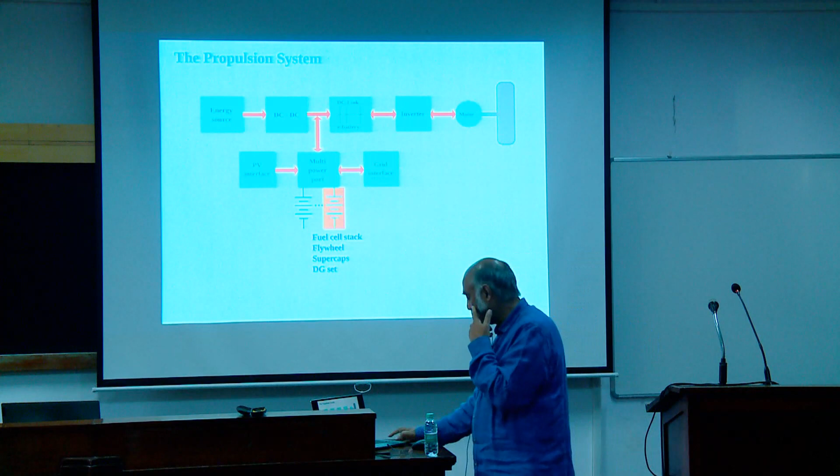The grid interface is slightly more complicated in the sense that if you have one EV or a few EVs in the city, no problem. But if all the vehicles in the city are EVs, evening comes and everybody puts them on charge, the grid will go down. Once the grid goes down, it doesn't see the load, and then it will come up, and then the grid again sees a heavy load, and it will go down again.

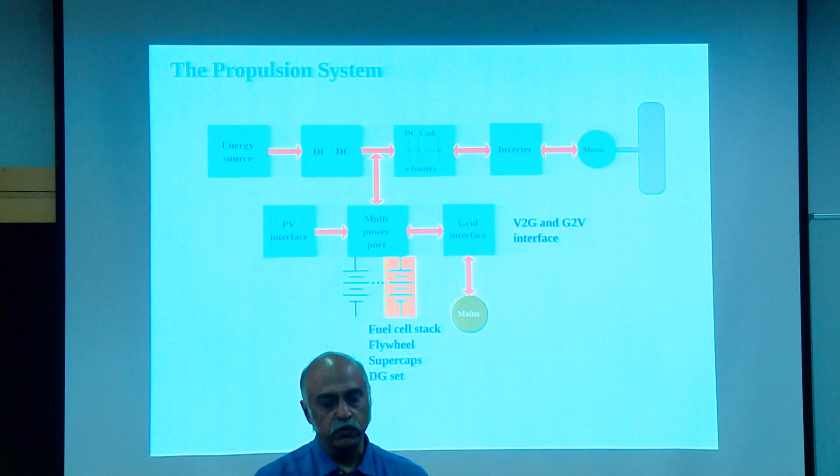So it will start having a problem, and you need a very intelligent solution. V2G solutions are something that really has scope for research, where the batteries in the EV will act as buffers - you take out energy from the battery and put it back in the same cycle, reactively, like synchronous capacitors. So they will act as these kinds of buffers which stabilize your grid.

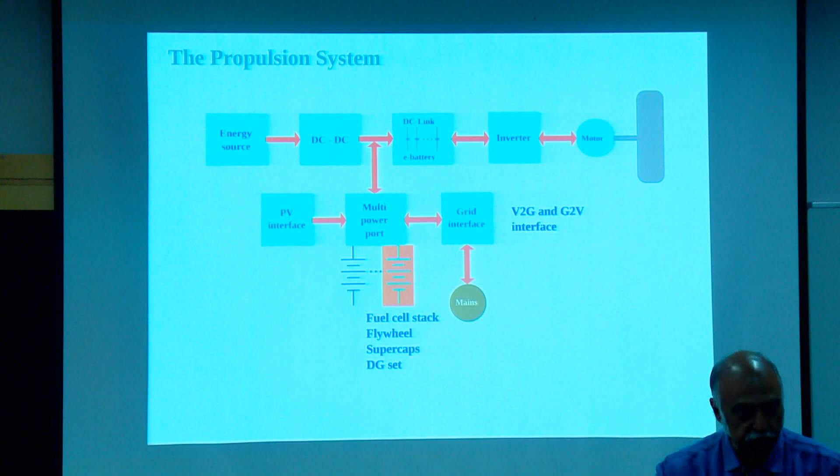Which means - which battery should I use as a buffer, which battery should I use as a source, which battery should I use as a sink. That is where the issue will come among the million EVs which are plugged onto the grid. That is the challenge which will start coming in.

Before we go forward, something on the energy budget - these are some numbers obtained from having an electric vehicle moving in the campus, several rounds of campus trips within the campus, not gone outside this one.

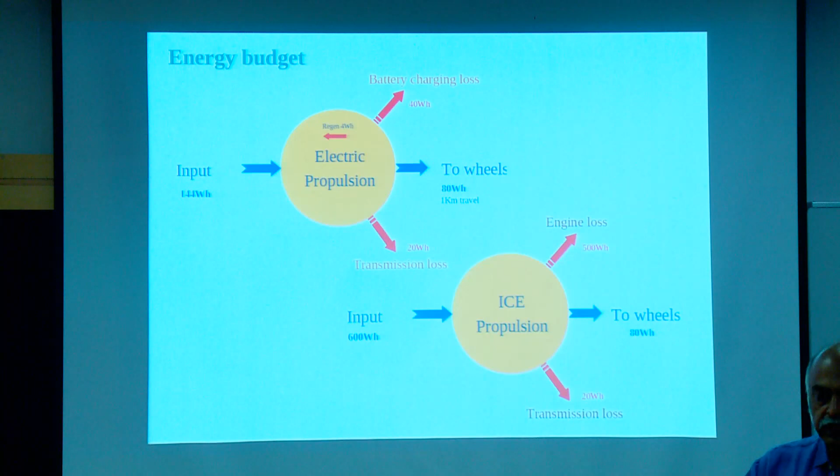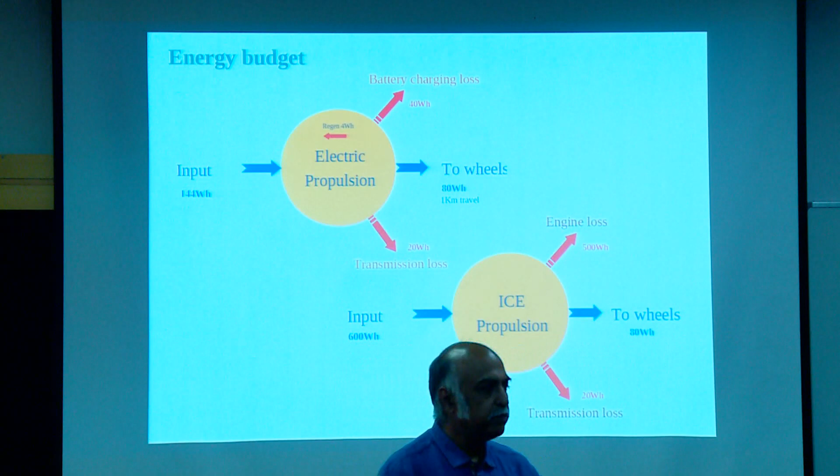You should take this as a feel, in the sense that the road qualities are much better within the campus than outside, so the rolling resistance is on-campus rolling resistance, and there is not much opposing wind, so the air drag is also minimal. Under those conditions, with the same weight between an IC engine and electric vehicle, this will give you some feel for the numbers of how much energy is going to be consumed.

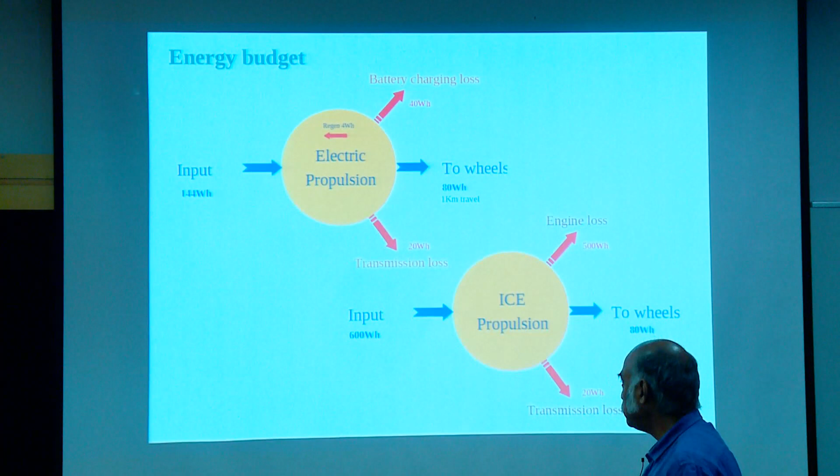So if you take this fellow, if you travel 1 kilometer, you will need 80 watt hours for the wheels, 40 watt hours. This is not under acceleration condition, but under stable, steady velocity conditions. So battery charging losses, transmission losses, there will be a gearbox, a fixed gearbox, and it will have some loss. 4 watt hours will be put back due to braking, and you will have this up and down on roads. So input is 144 watt hours, and out of the 144, you get back 4. That is what you will see at the wheels, meaning at the vehicle.

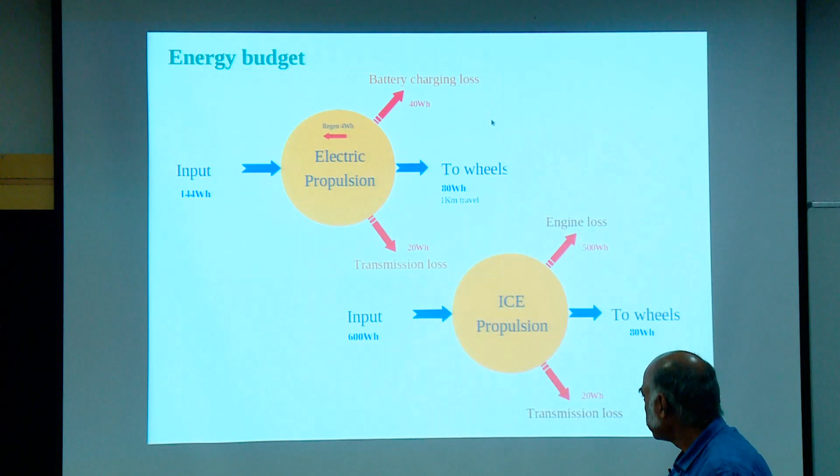And this guy is slightly more, in the sense that 80 watt hours, 20 watt hours, that will be fixed more or less. The 500 watt hours in the engine loss.

Now that is where people are thinking that they are going to save the climate and save the earth, but it is not so. Be wary of this. You will see a lot of advertisements.

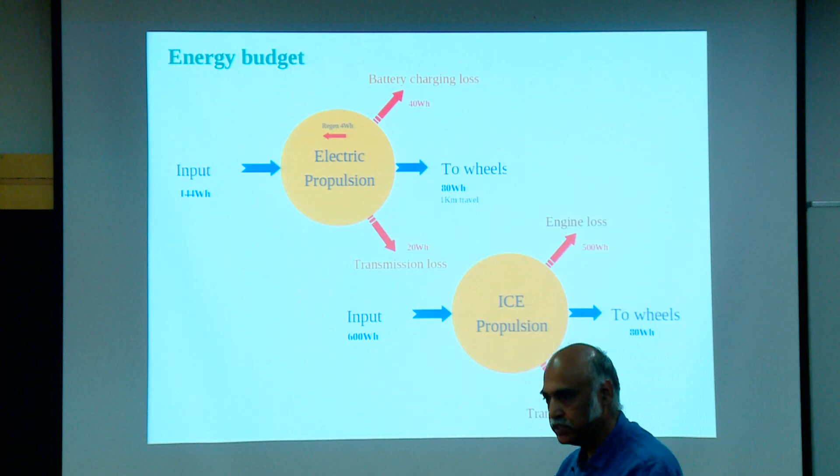Green power, EV is very green, and all those things. But what we have only done is shift the pollution sources from the wheels to a central source, maybe manufacturing of the batteries and things like that. You are not going to save much, and especially in a coal-driven economy like ours, with transmission losses, it is going to be much worse. So better to use the ICE if it's about saving the planet, but if you enjoy driving EV, just enjoy it. Don't say that it is green, even though the board is green.

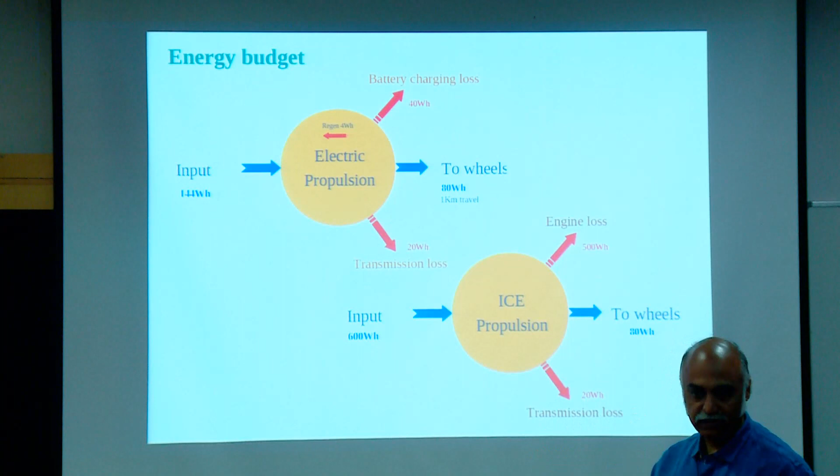Here again there are some myths. On the left-hand side is the EV, on the right-hand side is the ICE engine. The ICE engine's one significant advantage is that it is using the best fuel on the planet, the best power density, the best energy density fuel on the planet, which is around 12K plus, 12,000 watt hours per kg.

No other source on earth can match that. Lithium ion is at 250. This lead acid battery is 35, very nice, right, watt hours per kg. So you will never be able to, at least in the near future — I can safely say that because I don't know chemistry, but chemistry guys will have to work real hard to get to the energy densities which nature provides. Petrol is that, diesel is also around that much, coal is around 10,000 to 12,000. All the fossil fuels are in the 10,000 to 12,000 bunch.

So on the other hand, if you look at the efficiency of ICE engines, 15% I have put on average, but today's ICE engines are at 22%. You have the good machines which are even 25%, and you have the bad machines which are still lower. But on average, I can say 15% on the ICE side and 70% on the other side.

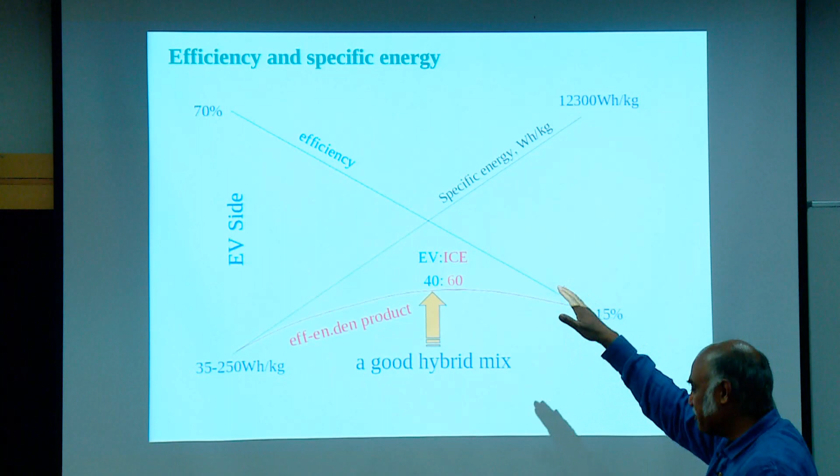So anyway, we will talk only from the EV point of view, not that side, otherwise we will get very discouraged. So from the EV point, enjoy power electronics, enjoy the EV, that's all.

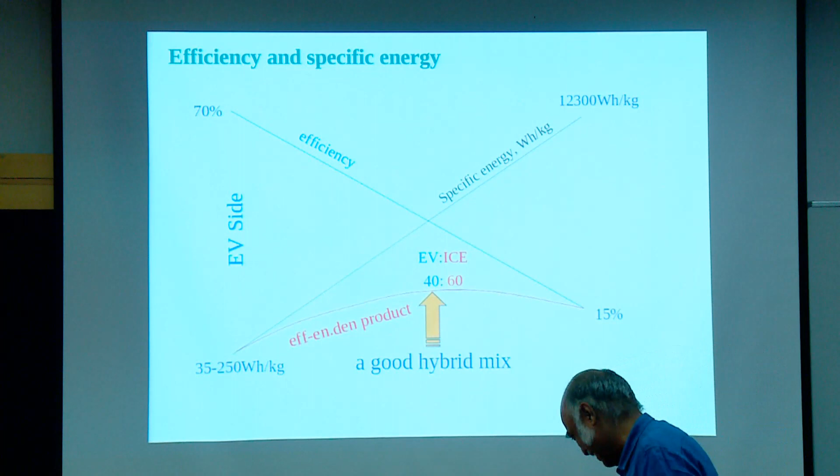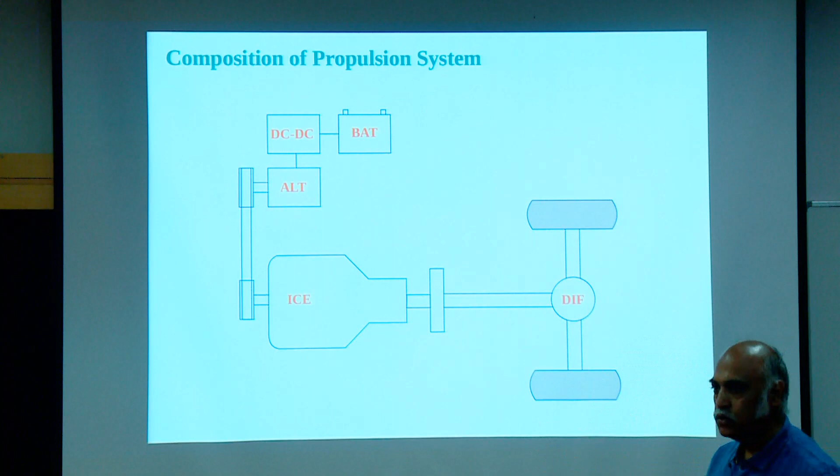Let us just see the composition, the components, what goes in. So this is a typical ICE engine — I am representing the internal combustion engine as that, and then you have the differential and then the wheels. This is what we have been driving all along. And we have an alternator — normally in all this, we have an alternator that charges the battery. So I will say you make it big, you redesign that alternator, and then to that shaft I can have that alternator, and then a DC-DC converter.

The DC-DC converter we know how to do. Power electronics is a solved problem, so today we don't work on power electronics.

We only work on the software within the embedded software controlling the power electronics, but power electronics is actually within an IC or within a module. So it is a VLSI, power VLSI problem, no longer a discrete electronics problem. But anyway, power electronics definitely plays a role, but not much research content there—you know how to make it, or you can buy it.

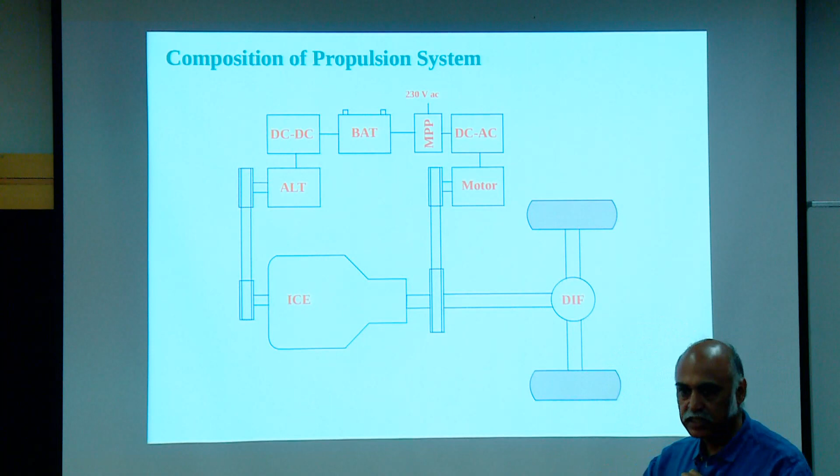So that charges up the battery, and we have a multi-power port. A multi-power port is again needed because you are going to interface several ports. And then you have the DC to AC—I put DC to AC because I am favoring the induction machine, but it could be any other machine. So these are all the components that come in. If you take the EV mode, it is just this much that will be used: the power flow from the battery, and the battery is charged externally through the multi-power port.

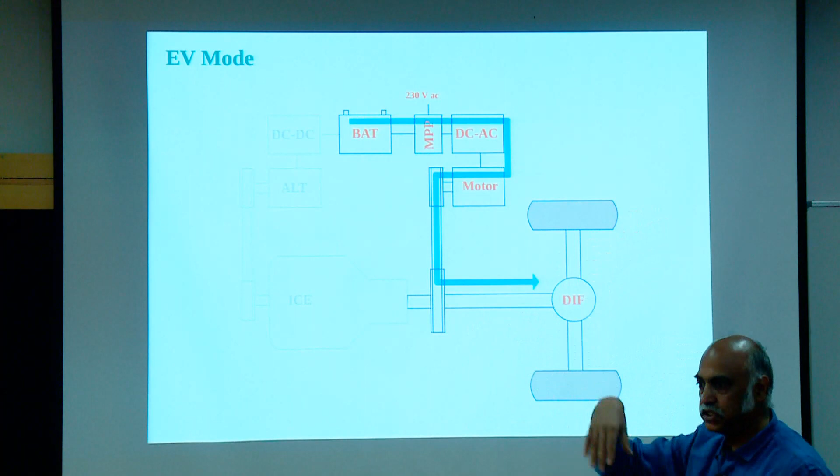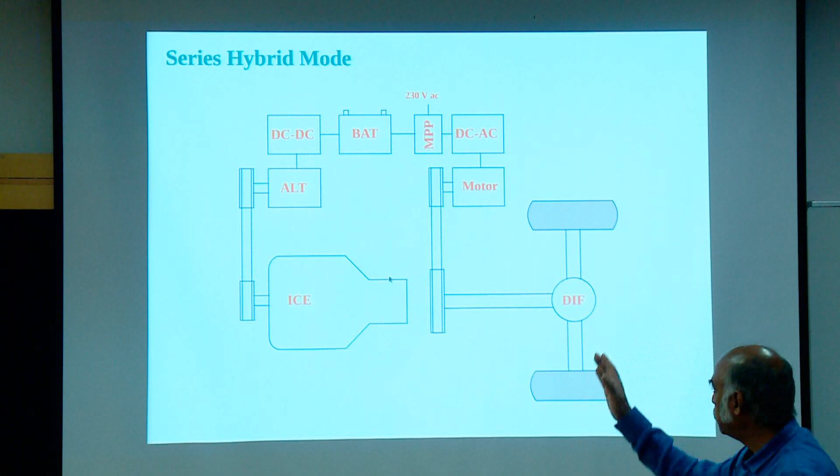And the series hybrid—in series hybrid, this part is removed, it is grayed out, there is no connection. So this ICE engine is operated at highway drive. Assume that the ICE engine is operated at its most efficient part, decoupled from the road, drawing the grams per kilometer at its most efficient way. So you set it for that, and then you have the rest of them. It is like in series, in the sense that you have one source pumping to the battery, and the battery pumping again to the road. So that is the series hybrid.

More interesting is this combination hybrid, where you have all possibilities. You have the ICE engine driving and also the battery-motor combination driving, pushing both together—that's parallel mode. It could also operate in series mode: I am standing at a traffic signal, and therefore this can be charging up this, and then power flow—that's series mode. So all this can happen simultaneously. So this is, power electronics wise, a combination hybrid, but the Prius had a much more wonderful design.

It uses this sun planetary gear system. This part, you see that there is one shaft here, another shaft, another mechanical shaft, and a third one. So you have 3 mechanical shafts coupled together. So it's very difficult to get omega addition, meaning speed addition, in a mechanical system like this. So the sun planetary gear system is very, very interesting.

So here, this is the alternator. This will go on to charge the battery. And this fellow is the main motor, connected to the wheels here. And the IC engine is connected here, and through this chain drive, it is connected here.

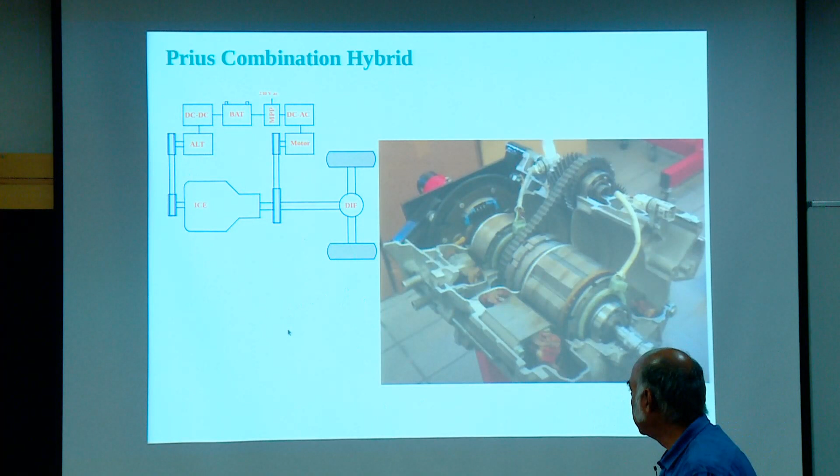I think even the Hyryder uses this now, but a much more evolved version. This is the very old one. So just some old shots of a series hybrid. We took the chassis and built around that, and made this one. This is very old, from 2003.

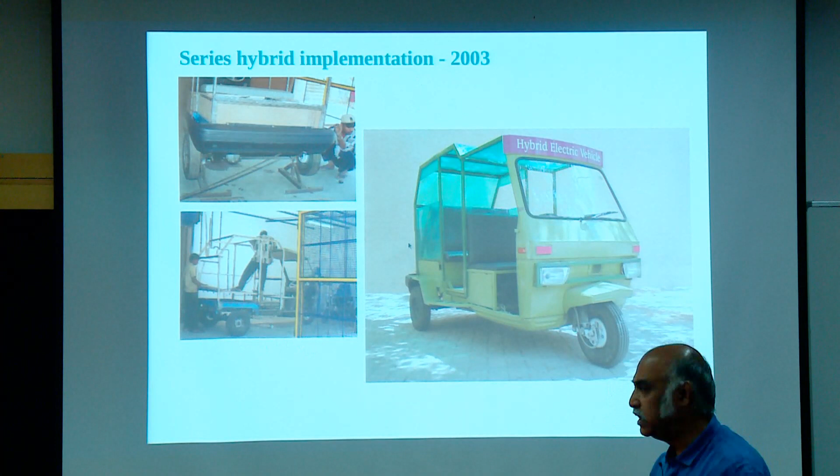So this is where we first started learning. We made a very horrible inverter at that time, but it ran. Still, I would not do the inverter in that fashion now.

So later on, much later, we did this parallel hybrid. Parallel is very good for retrofitting. You have the other wheel which is not driven, and to that you put the electric drive, and you can seamlessly retrofit. Now this is a problem that will come. One of the challenges: what are you going to do with the millions of vehicles already on the road? You can't put another million, right?

You have many millions already. You will have to remove this. Where do you keep it? Where is the real estate to keep that? So what is the archival method for that? That is a serious challenge.

So we can't just change everything to electric. One way is to seamlessly shift. So the bridge would be to retrofit. I would say this is the way you can probably do that: retrofit, go into the parallel hybrid mode, still use petrol, gradually decrease the petrol part and go towards EV if you want a pure EV mode. But I would not recommend going to pure EV mode for different reasons, because you are not actually going to save on pollution levels that way. You will reach an equilibrium somewhere around 40-60, and that would be the best situation.

So you need this kind of approach. You cannot overnight change everything. You need to move seamlessly, gradually into that. So this parallel hybrid mode is something you can actually do.

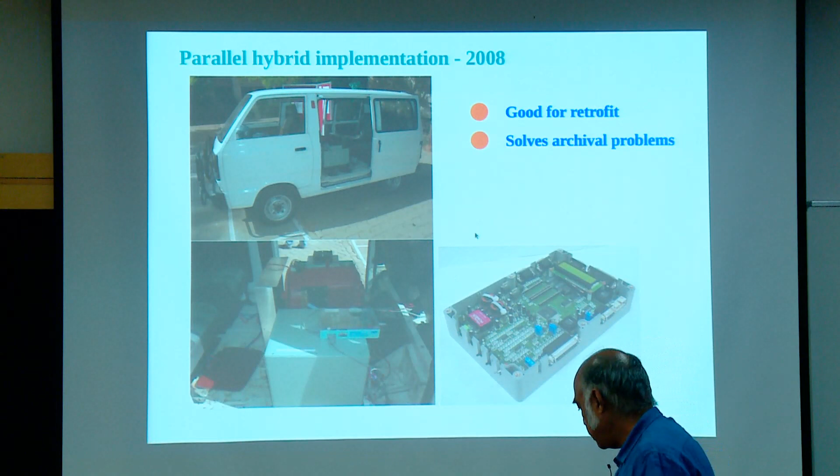So this is the present model running in the department. This is actually an open source chassis, so you can buy it open source. It's called that because they give all the drawings of it, so we can modify and custom make it. In our workshop we've done a lot of customization, but you get an open source chassis with all the documentation — this is called Tabby. You can go online and buy it. You don't need to break your head on several suspensions, joints and universal joints — several of these things are already done.

So to this we have attached a radiator here from an Alto. We got an Alto radiator from the local Yeshwanthpur market and fixed it here. And here is the inverter, and at the back we have the lithium polymer batteries.

This is another thing I will not be discussing here, because it's outside my area — this is a smart windscreen where other IoT and communication people are working on anti-glare issues and smartness, in the sense that you see the map on the screen, and during the night it can become translucent, during the day transparent, all those things. So those kinds of things are being done, but I will not touch upon that.

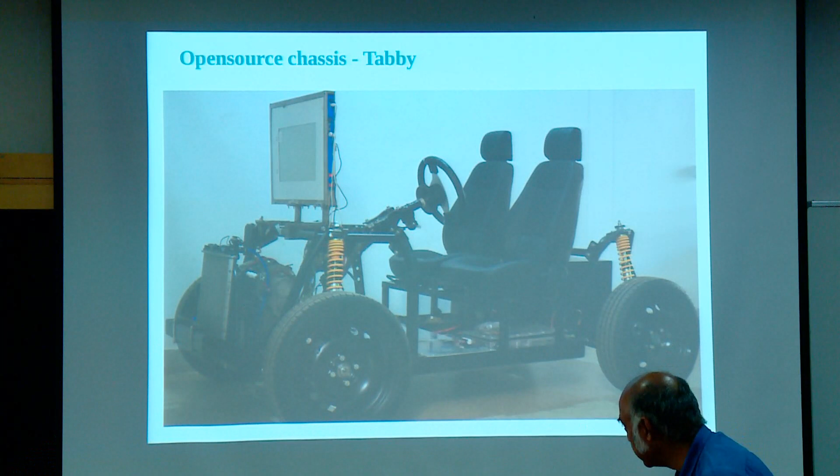We are more interested in this. So there is a motor here — probably I have a clearer picture of that one. This motor was here, it is removed. It came when we bought the chassis, along with it came a motor.

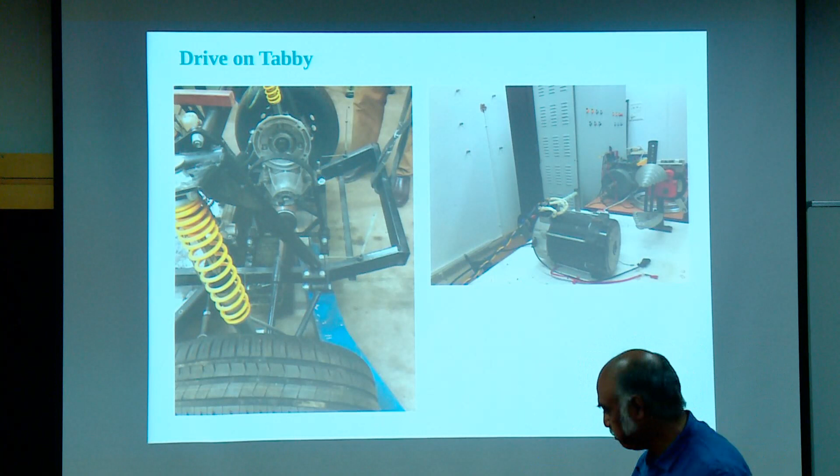It was a very horrible motor. When you test it, you see that it is not sinusoidal in distribution — it has a stepped flux distribution, very horrible. Initially we did some running with that, but the waveforms were not something you'd be proud of as a power electronic engineer. So that was removed, and now it's rewound for a sinusoidal distribution. That will be fitted in, and hopefully the newer students will move it along the campus.

Okay, so this is the drive made by the student.

So what the PCB is, is the one which is done by the student. The base enclosure was a broken-down Semikron module. It was completely potted, so we had to dig it out. So dig out everything, make it into aluminum, and then on that we laid the capacitor bank. So this is the capacitor bank here. Okay, and this is the...

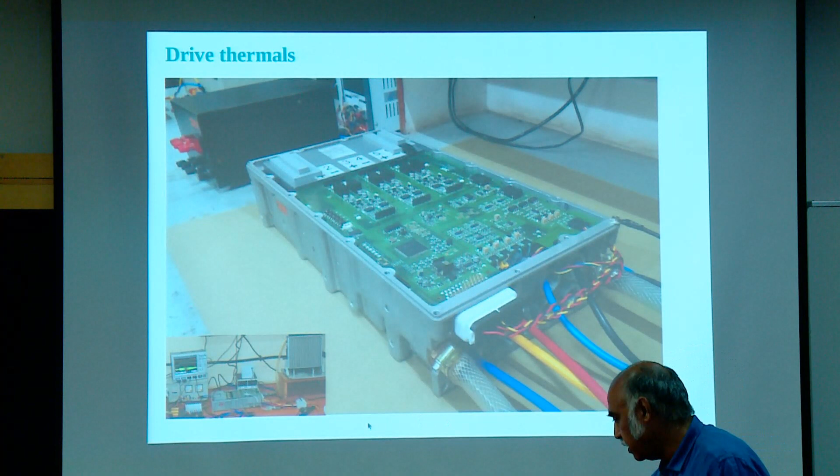So the interesting part here is not the power electronics or the DSP board here, which is a 4-layer DSP board. The interesting part here is the thermals. So you have water entering here through this pipe, and water leaving out here, and underneath here is the IGBT, and you have the cold plate through which the water circulates and then removes the heat by mass transport. So the challenge there is the design of the heat removal through mass transport, and that is where a lot of importance goes in.

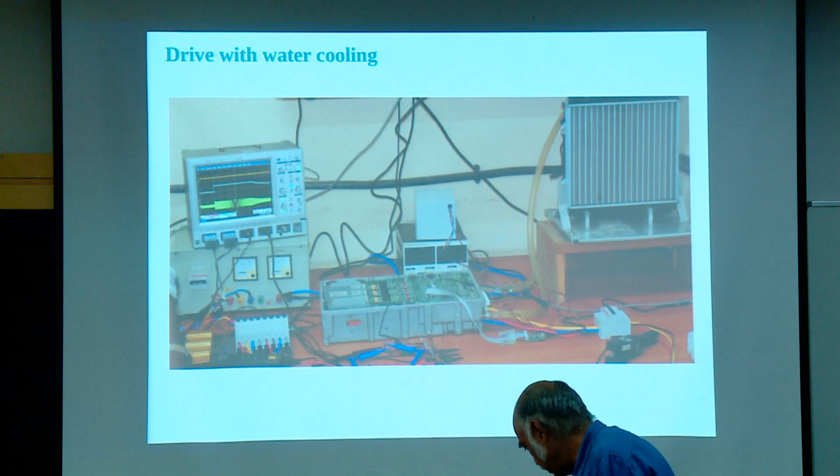So this is testing it in the lab. This is the inverter combination with the DSP, and then this is the radiator, all put together to test that. This is a standard vector control waveform. Okay, so then we wanted to remove the Semikron enclosure and put our own enclosure. We redesigned it.

This one? Okay, no problem.

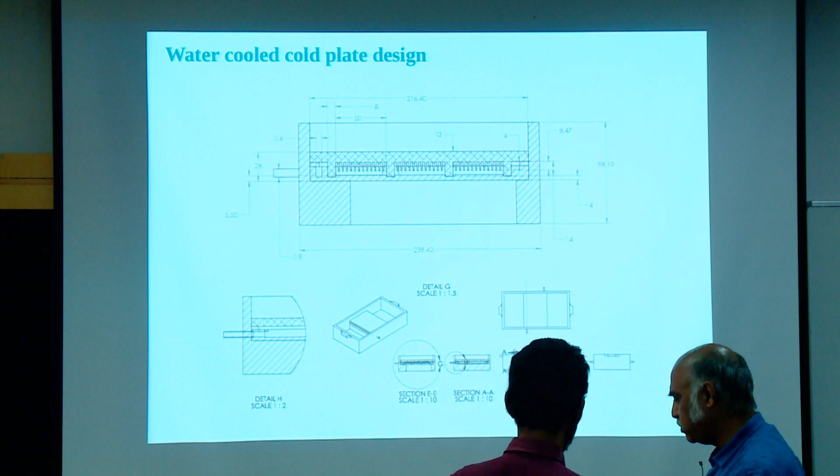Okay. So here, let's say this is the enclosure. There is an inlet and an outlet, and under this is where the fins will be. So this is how it will look. The fins are milled out, and water will flow through like that. Water will flow through here, goes in and then comes out. So it goes in a zigzag fashion. It'll go through like that and then come out. Okay, so these are milled.

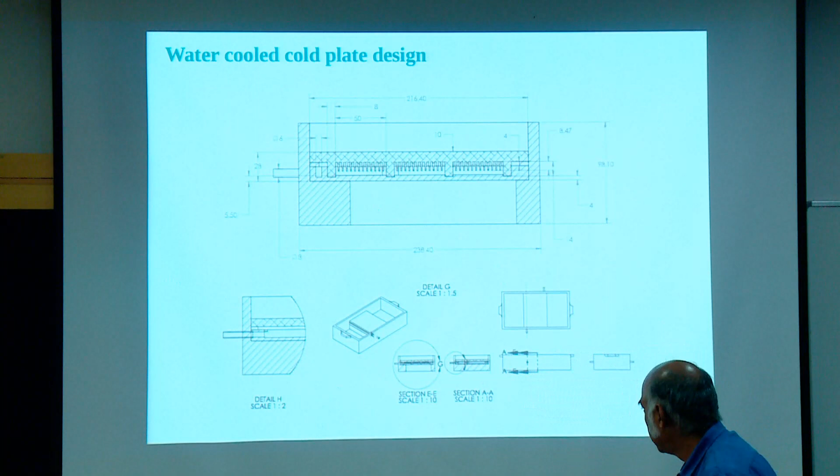It was actually a complicated process. Now thinking back, there are much better ways to do it. So we first did a sand casting. You have a sand mold foundry, pour in the aluminum and then machine it, and then afterwards plug in these bushes here. But that was very, very complicated. Probably for a one-off process it is fine. But the main point is designing these plates; underneath are the fins pointing down, because the water goes in and comes out through that.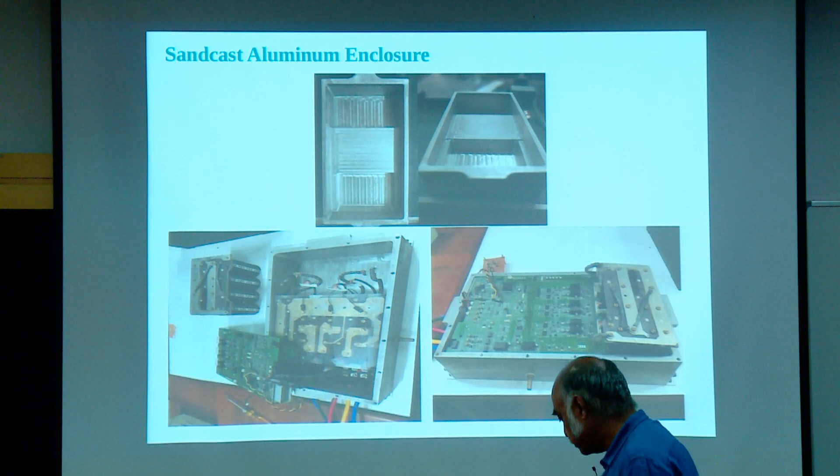Okay, so the electronics, probably what will be of interest to you, power electronics: internally it is nothing but, as I said, the capacitance, and this is just a 2-level, 3-phase inverter, and this is the thermal section, the water coming in and out, and this portion is the control board, DSP 320 F28X series, and the induction machine. So this is basically what goes into that drive.

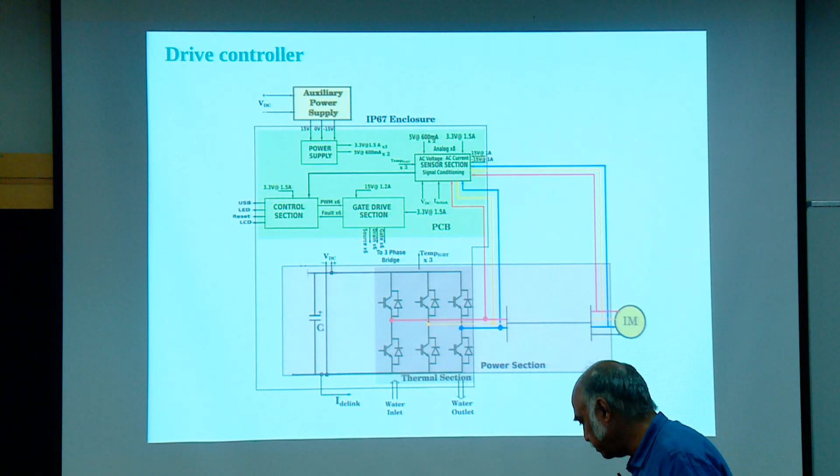So how do we test? It is a 300 amp device, and drawing 300 amps from the source and then trying to test is very, very difficult. So you need to have this kind of a setup. You have the grid, and then you have a front-end control. The front-end control is like a transformer-less grid-connected inverter, what they use for PV. Let's say you use that, and assume that you have control on the control board.

So you operate this in voltage control mode and set the ID, like a STATCOM, to draw power from the grid. So draw current from the grid, voltage is fixed. This is in voltage control mode, and this is the inverter under test, whatever inverter you are building, and you have the isolation. This is a 100 kVA transformer in the lab, and this feeds another standard inverter and another front-end converter. This is like a normal transformer-less grid-connected inverter pumping to the grid, like PV pumping to the grid.

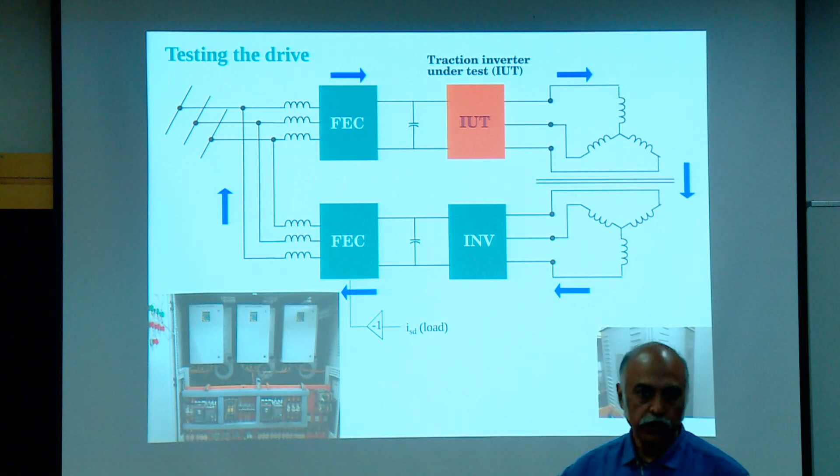So this is FEC1, front-end converter 1, front-end converter 2, and this inverter. These blue portions are sitting here, and on the back of that are the inductors. Inductors are really huge. So you set, let us say, 100 amps here. This will act as load for this, and this as load for this, and so on. So it is only the difference amount of power that you actually draw from the grid because of the looping back. So this is the setup. This setup is for 100 kVA, but the inverter is designed for 250 kVA.

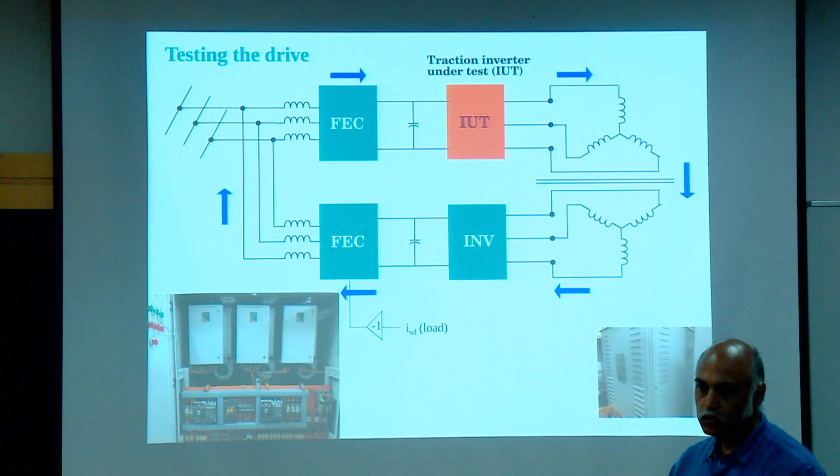And testing the motor is slightly more difficult. So we have a lower wattage test setup. Similarly, what you do here is not a fixed ISD that you will give. You will give it based on the city drive cycle.

So the city drive cycle, how do you do it? You run around the city. Means you run not by walk. You take a vehicle and start plotting, and then you could also take standard drive cycles which are available from the standards, but it's nice to actually run around the city and actually get the kmph versus time. Okay, so you do it many times and take an average kind of a thing, and this will give you the city drive cycle.

And as the voltage is fixed, you can find V into, you can find the power here and actually set what should be the current there, okay, by scaling. So this will act as the load for this, which will act as the load for the induction motor under test. So the induction motor is seeing as though it is driving on the roads. Okay, so that will give you kind of the behavior of the induction machine.

So this again loops back, and what you draw from the mains. So this setup you need to have, otherwise at low power you can test, but once you start going to higher powers, it becomes difficult.

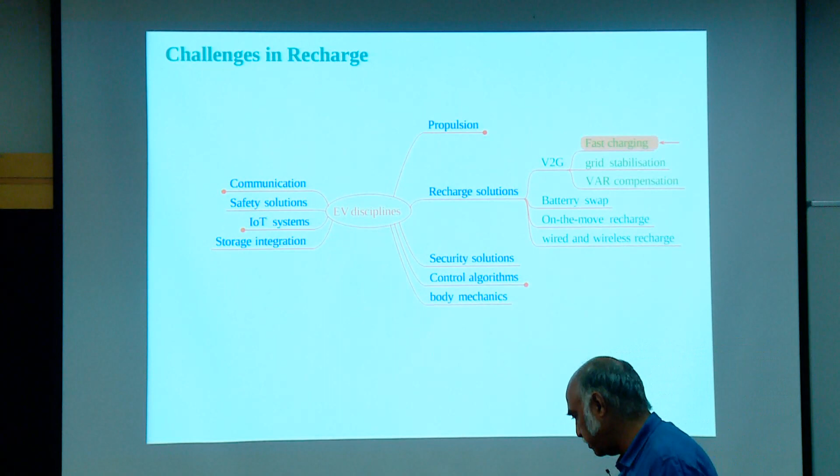Okay, another major power electronics kind of a thing is the recharge. In the recharge, there is a lot of research going on in fast recharge, but again, from our country's point of view, this is again a coal-based economy, and where is the power? Our economy is again power deficit. We have more loads than we can supply, and this is what has to actually supply your recharge. So fast recharge means you are talking of a very, very high power demand.

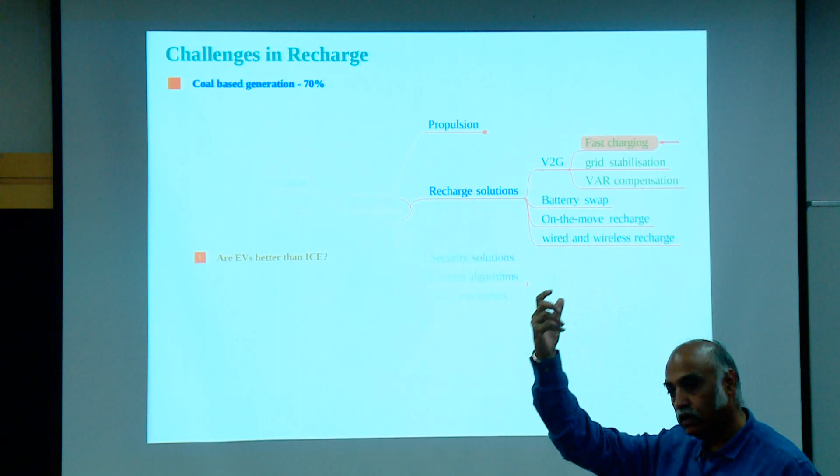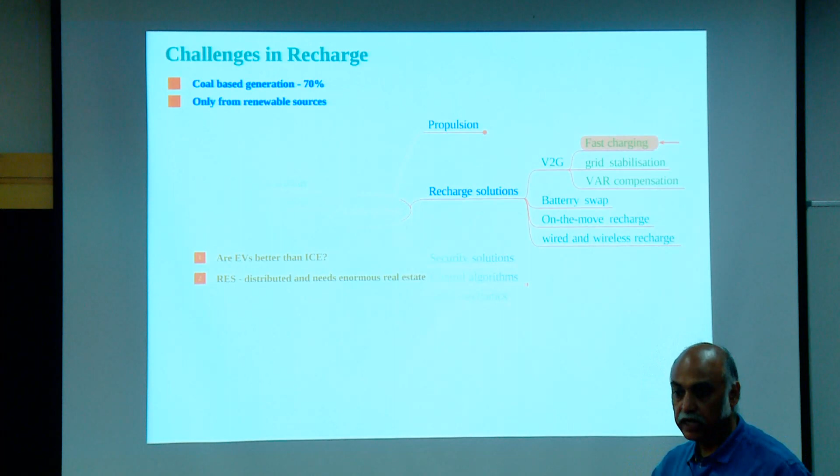So the question you need to ask is, is it really better to go in for an EV or an ICE? But if you have renewables in all the parking lots, and you make it a point that you charge only from renewables, then yes, it makes sense. Then you are taking only the renewable power in, and the transmission line losses won't be there, all those things. But on the minus side, you need a lot of real estate for that. So imagine the amount of real estate that you would need.

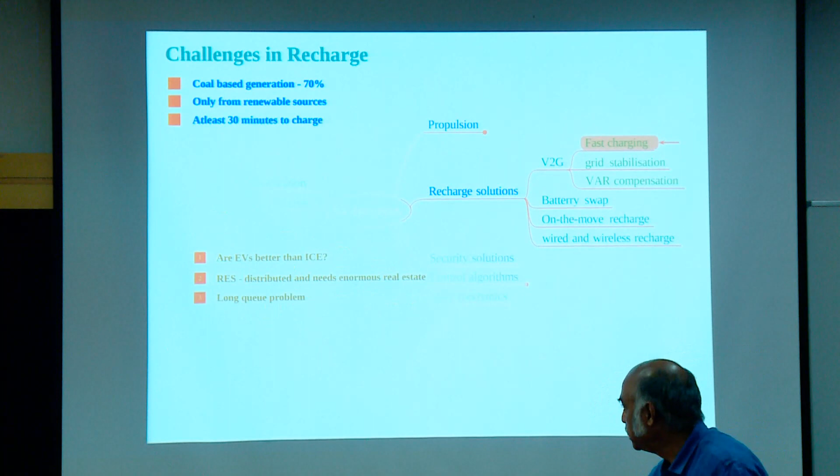Whatever the fast charge, the fastest I would say is 20 to 30 minutes, and that is still quite a long time. You go into a petrol bunk, stand there, fill up the petrol, and get out. It is 3 minutes on average, if there is no queue. But even for that there is a queue, right? Now if you go in for 20 or 30 minutes and out, the queue length will be really unmanageable. Fast charging is not feasible, but you can do research on that.

But the point is, that's where the battery is the weakest link. The fossil fuel is so beautiful. I should not be telling this. People will come and hit me.

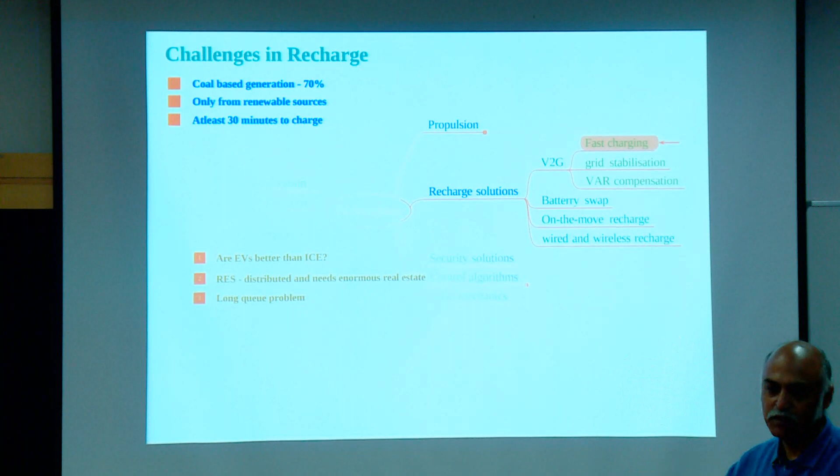But the point is that nature has made such a beautiful fuel, but we are wasting it in an undefined fashion. It is so compact, made over the years, and we are not able to get anywhere close to it. And in trying to make it more compact, we are creating more pollution to make those compact batteries. So it is something very strange.

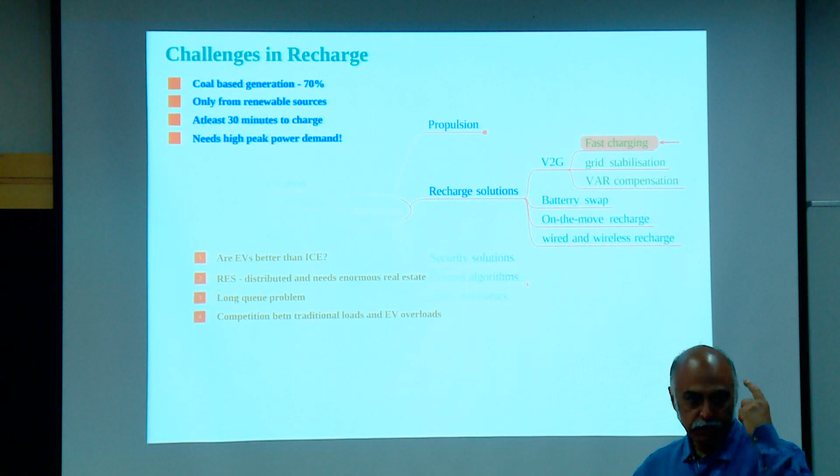If all of them are going to demand very high power in that 30 minutes, what will happen to the other loads? So keep a thought on that. These are challenges that you need to actually overcome.

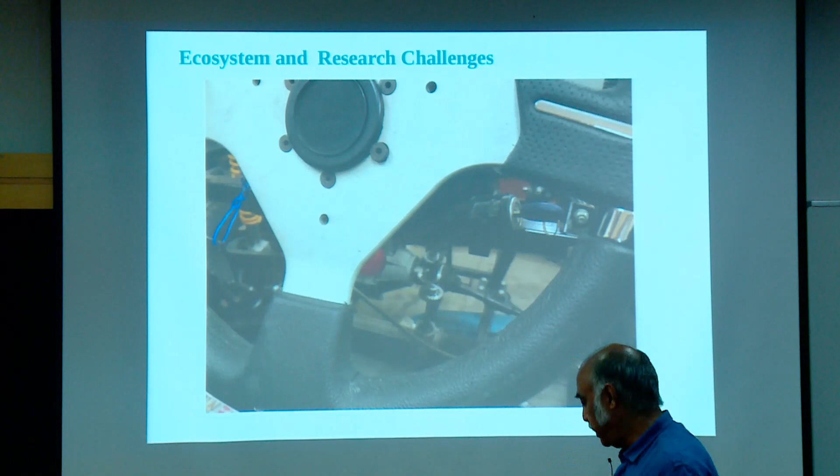Okay. So as I said, we can customize the chassis. We have put in something here in our workshop. That is connected to the steering rod, and we are fixing a steering motor at this point for the purpose of steering control. Why is that needed? There are several advantages and several research angles in this part. Though it doesn't directly come in power electronics, it is control of power electronics, so I thought it is relevant to bring it here.

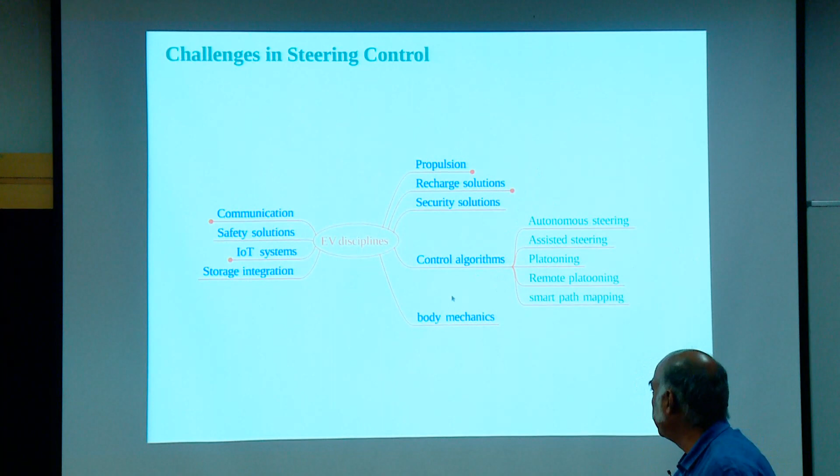So autonomous steering, assisted steering, platooning, remote platooning, smart mapping, these are all the applications that can fall into this. When you say autonomous driving, it means no pilot, no driver, so driving without the driver. And remote driving means that there is a driver, but he is not sitting in the car, he is elsewhere, but still driving.

And driver assist means that a driver is driving, but he falls asleep, which is common. In fact, the majority of highway accidents are due to driver fatigue. When I am driving long distance, I tend to doze off. My Mrs. keeps saying that, but apparently it is the same for many people. So in long distance driving this happens, and this is the cause of several highway accidents.

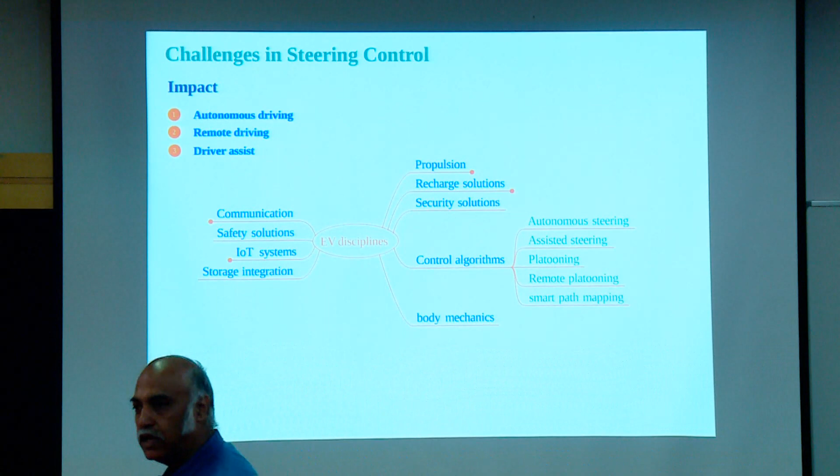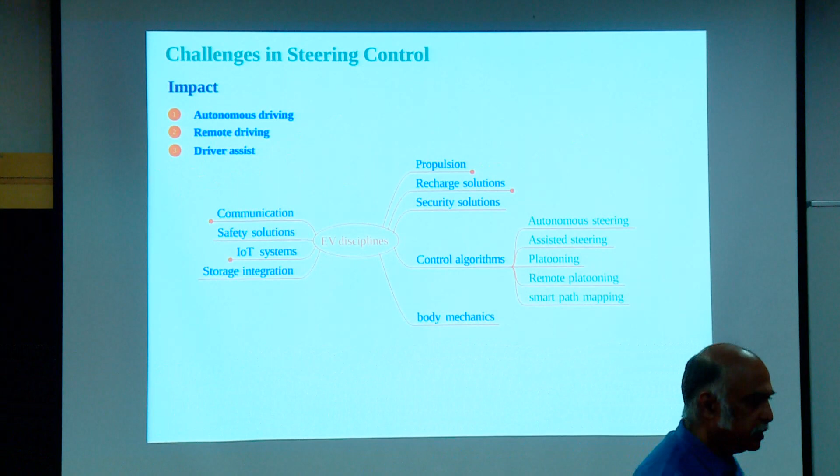When the driver starts going into sleep mode, or at least doze mode, the assist takes over and does autonomous driving. And when the driver starts shaking his hands, and you are able to detect that he has woken up or is active, it is seamlessly handed over to the driver. So the driver doesn't feel that he has dozed off, but actually it was handed over into an autonomous driving mode. This is becoming very research oriented, and a lot of work is going on in that.

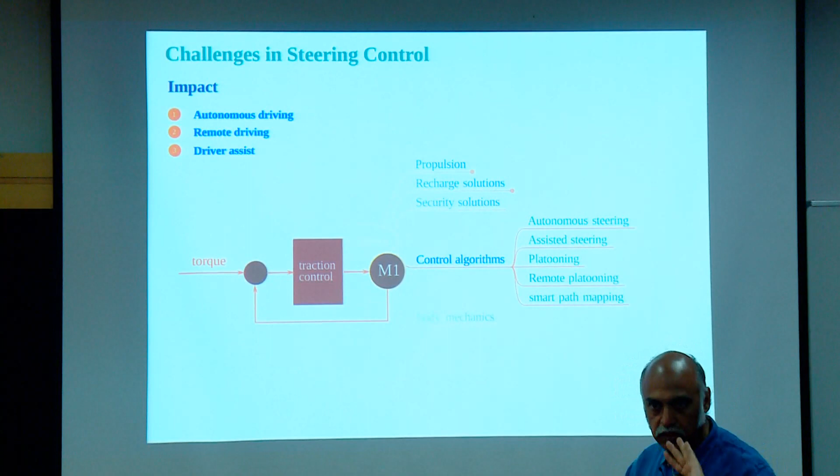A simplified block diagram is that you have traction control, V by F control, vector control. Most drives will be vector control. You are able to set the torque, so they are all in torque control mode, not speed control, because your foot pedal in the car is controlling the torque. The speed is controlled through your brain; you are the speed controller. So as far as the vehicle is concerned, you give a torque reference.

There is another motor to control, which is the steering motor, where you need to give the angle. And the only sensor that you can give a license for is the vision sensor. There can be LiDAR, several ultrasonics, all those things, but the license should be given only to the vision part. So it should be self-contained with vision, in the sense that you cannot go and hit a person or anything based only on this. With the vision sensor, you know how to drive.

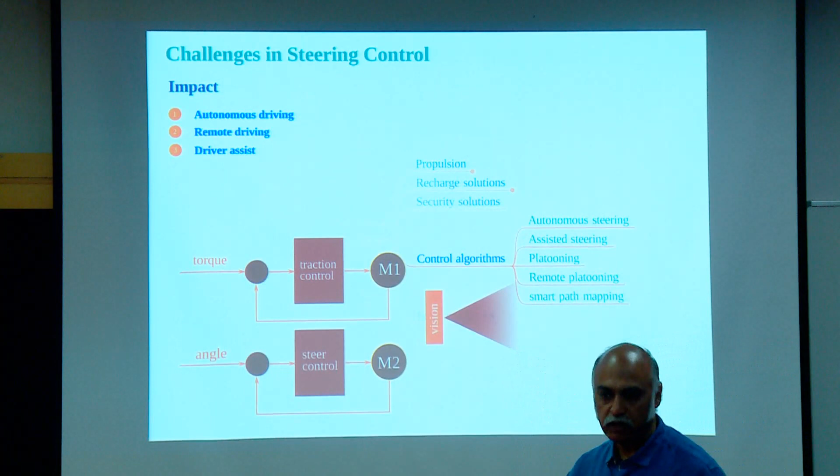You are not going to collide with anybody. However, I may not know how to go from A to B; that's a different problem, where Google Maps and those things come into the picture. But a license is given for anti-collision. Just with the vision sensor, in all possible forms, it shouldn't collide. That is the challenge. Each person can have their own driving character based on vision: you fit in your mobile, its camera is the vision, your driving character is in the algorithm, and the vehicle is driven according to that character.

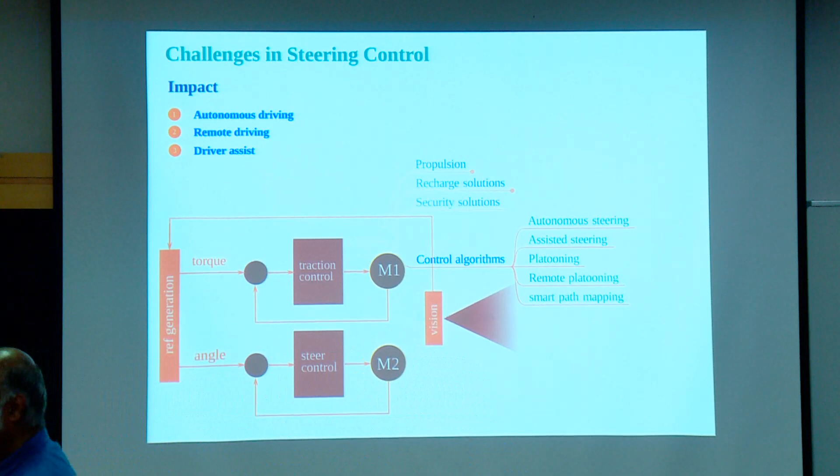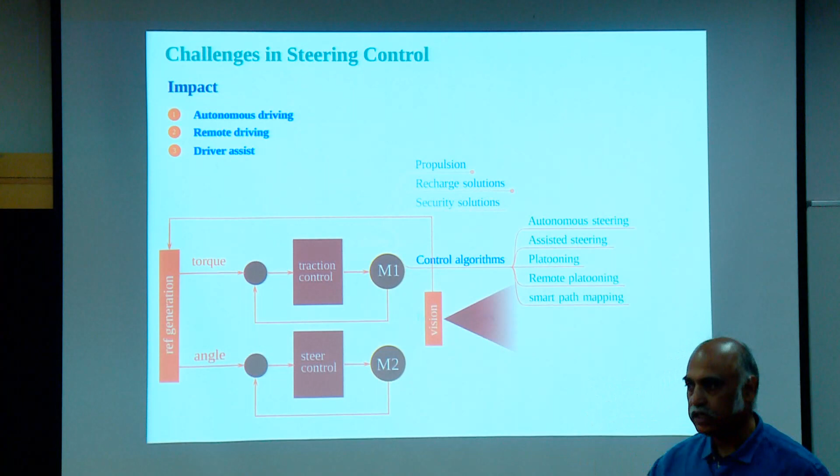So just a monocular lens is your ultimate sensor, and generation of the torque reference and the angle reference is the crux. Very, very difficult. This is a research problem, not done until now. There are several autonomous driving prototypes across the world, but not with only a single monocular vision sensor. More sensors means a reliability issue; one sensor failing and you will have an issue with collision. So you need to give a license only to that, just like humans.

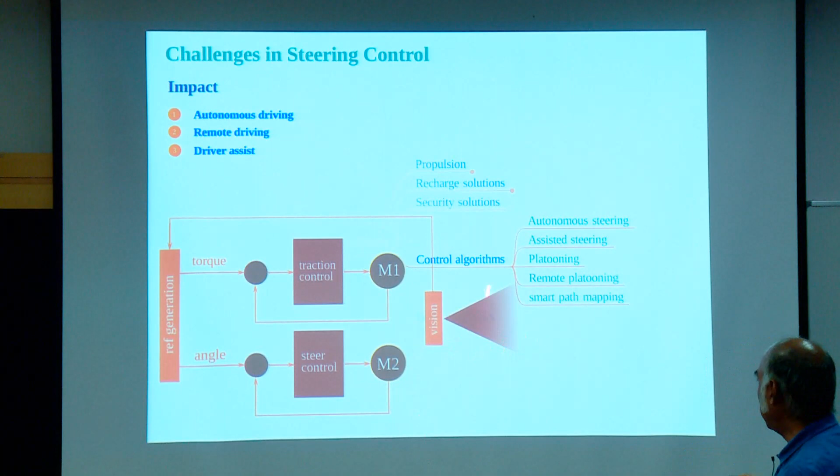You give a license only to the guy who can drive with these visions. Okay, so that is important.

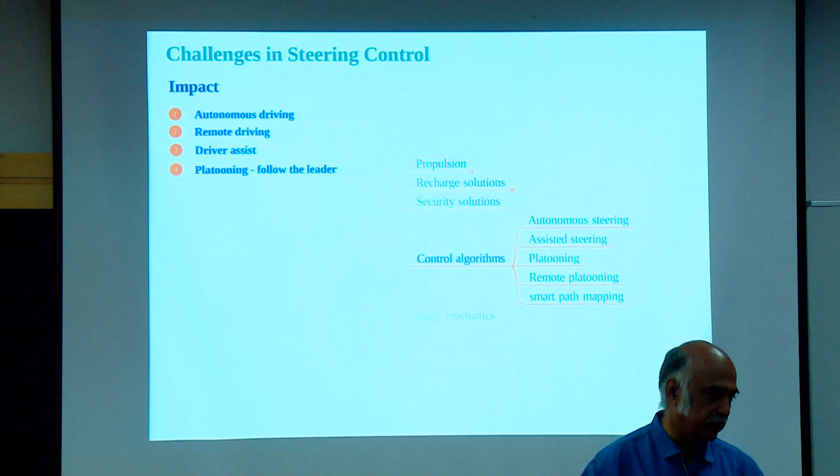Platooning is coming up in a big way. Platooning means you have a fleet, a platoon of vehicles - a fleet of lorries, buses, cars - and one driver. The one sitting in front is driving, and all the others are following the leader, in an autonomous way. So this is control.

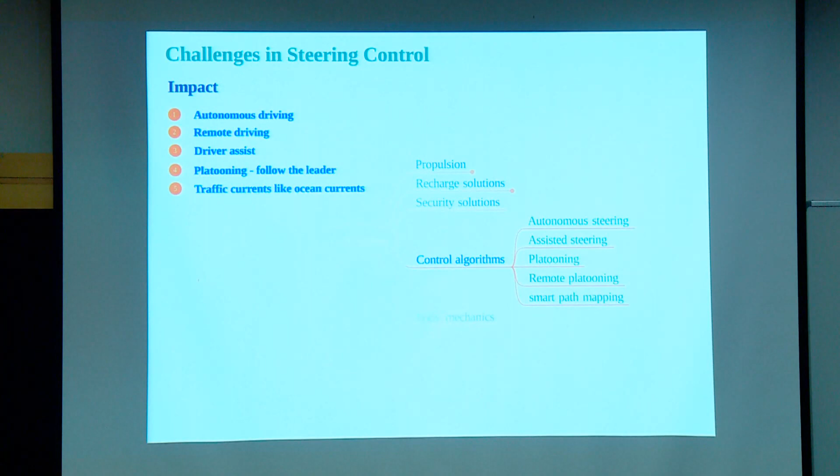The fifth one, dream world, but something that will come up in the future: traffic currents. The name comes from ocean currents. In oceans, there are several currents where when you get into the current, it will take you along and leave you somewhere, wherever the current ends.

The application people are seeing is that at many traffic junctions, you are standing maybe 2-3 cycles as the traffic cycle goes, red to green and so on. You just make a move, but the reason it happens is cascading - the person at the end doesn't know what's happening in the front. There's a buffer, and people switch off their engines or take time, so there's a lag for moving. The person in front starts moving, and it cascades like a low-pass filter - by the time it reaches midway or the end, people realize the signal has already changed.

But the model is that the entire segment moves synchronously. The moment it turns green, the entire segment moves synchronously and leaves you on the other side, which means you are not in control. You go to the traffic junction, something else is in control, and the moment it turns green, all the traffic starts moving synchronously.

You also have traffic zones, school zones, for kilometers of length - that is where the traffic currents come in. The moment you enter the zone, whatever the vehicle, you lose control, meaning you can relax, no problem. You are all going at a given speed as decided by the remote controller, and then it goes into the current, and you are left on the other side. That is the traffic current.

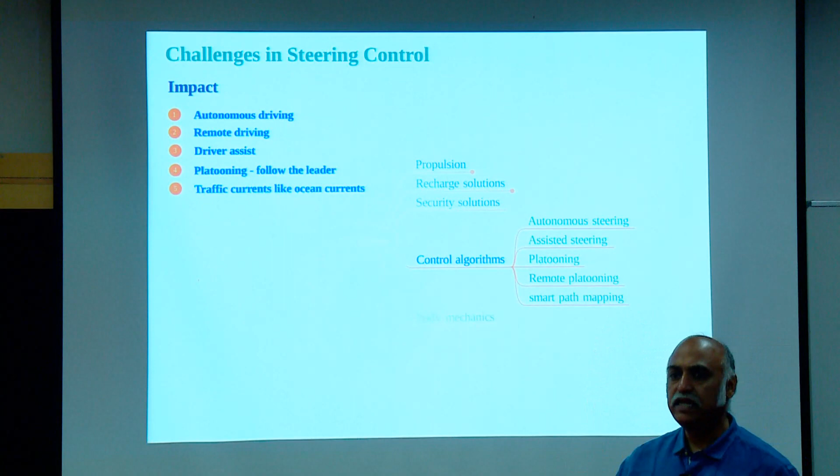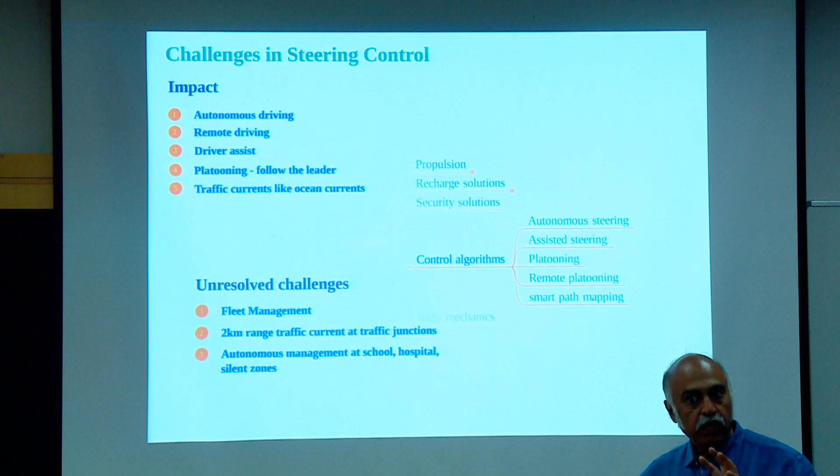This is also becoming popular. This is something futuristic, something that will happen - the technology is there to do it, we can do it, but it is not done. It is still futuristic, but a lot of safety issues will come into the picture. So these are unresolved challenges: fleet management, 2-kilometer range as I said, traffic current junctions, autonomous management at schools, hospitals, silent zones. These are all things that will come along due to this autonomous driving control steering.

Now, second part: non-wheeled. As I said, why should locomotion be wheeled? Nature does not subscribe to wheeled motion. There are no animals, no creatures which have wheels on their legs, right? It's always some different types of protrusions, as you say. So nature's locomotion is based on the minimum energy principle.

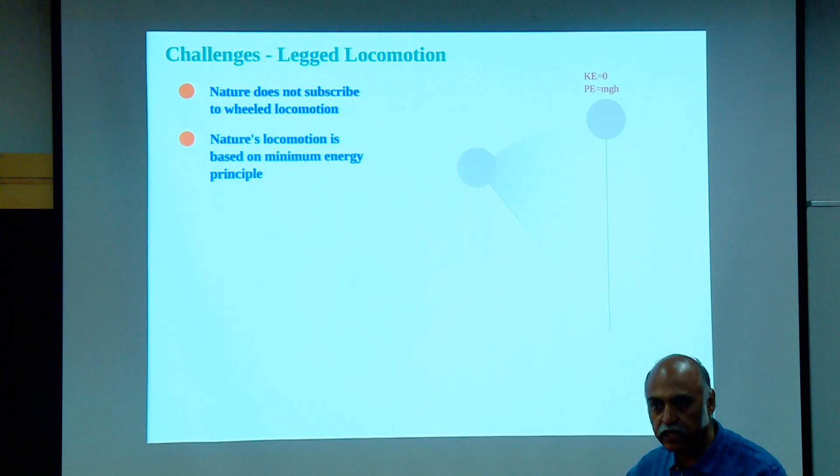It's like an inverted pendulum - you push the pendulum, it has potential energy, acquires kinetic energy and falls, and then you break the fall. You break the fall and the reaction pushes it up again, and so on, so it keeps going. There is already energy in me - I try to fall, then break the fall, and keep on cascading. Only the loss amount, when I put my leg down, there is a loss there, and to that loss amount you have to eat. So as you eat, you recover that amount. That is basically how things work, and the beauty of it is minimum energy.

You don't need roads. The amount of energy put into making road infrastructure is phenomenal, much more than the cars driving on it. So when you talk of pollution, of saving the planet - stop constructing roads and you will save the planet. It's much more than the cars that are driving on it. You have to make 10-lane expressways and highways for traveling at fantastic speed. So multi-terrain, no roads - that would be at least closer to nature.

Okay, that is closer to what we think should be. So, some implementational details here - one PhD student worked just on that.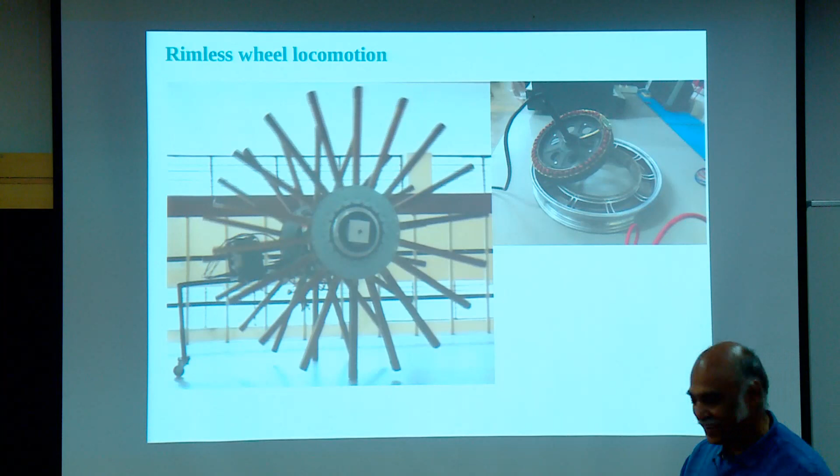This is another rimless wheel. You can go up and down the stairs, where the design is on the mechanics of the wheel, and here you see that the inertia can change intra-cycle. So the drive, when you are doing the drive, is not the same as doing it for a wheel where the inertia J is constant - here J is not constant.

And there is this, Theo-Jansen's linkage - very simple. This guy must have been a saint. He doesn't give the derivation of how the linkages came - it is just empirical. He says these are the numbers, the sizes, the ratios of the linkages are this. Then you get smooth, organic, animal-like motion with one prime mover.

That's all. So if you take a robot, you will have prime movers coming in everywhere, every wrist, but not with this one. Theo-Jansen's linkage is actually a fantastic innovation, but not exploited. It gives you really animal-like motion with one single prime mover, and another important thing is the distance from the ground is fixed. That is the beauty of this linkage.

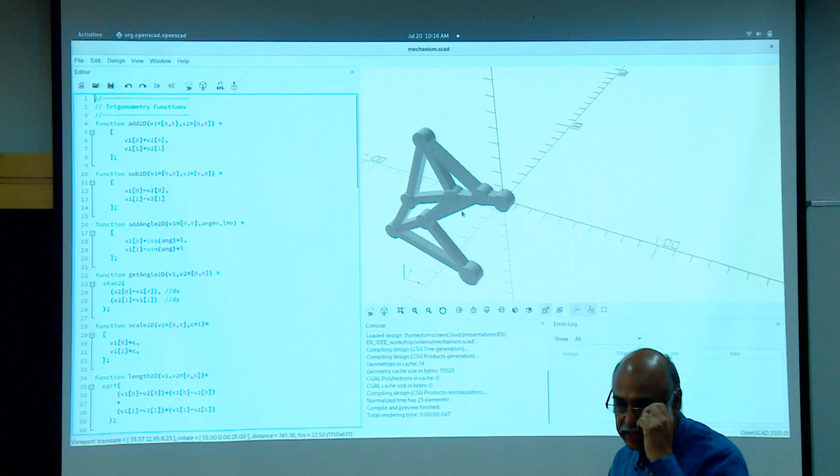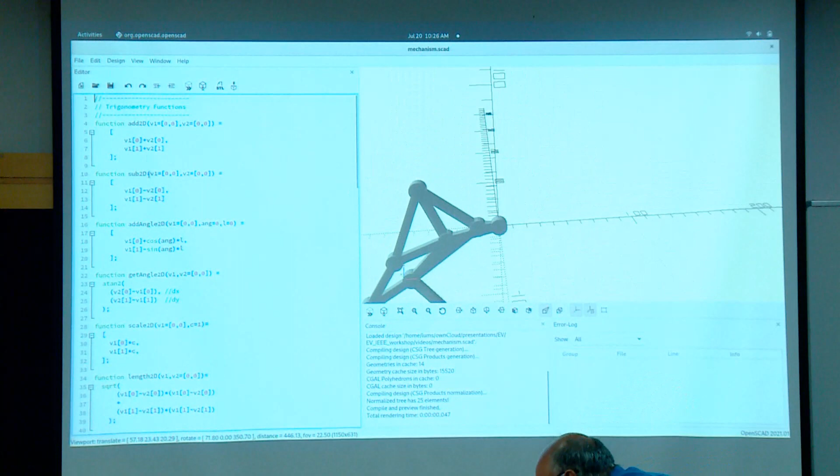Just to give you a bit more clarity, I will show this in OpenSCAD - I normally use OpenSCAD, open source again, and for 3D printing this is very nice. I do the 3D models on this. Let me show the animation of this - I will animate it, it will give you a feel. Don't worry about these numbers.

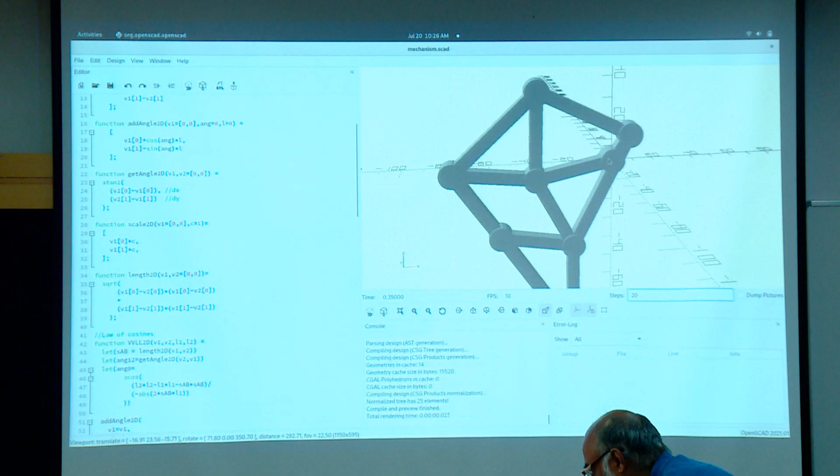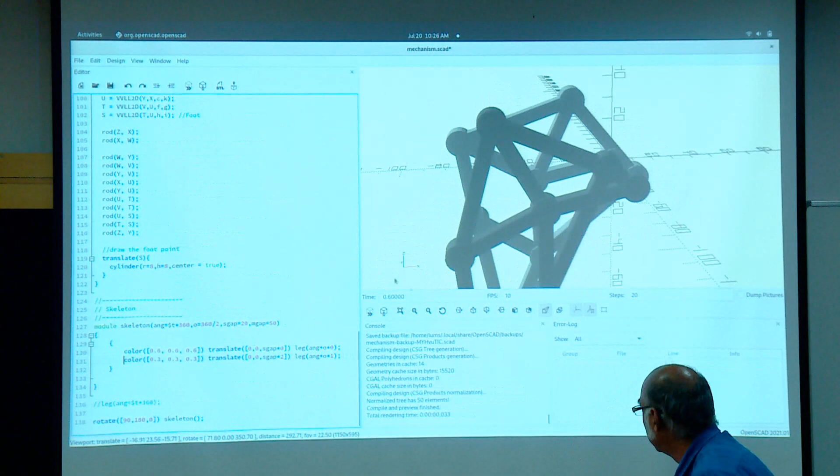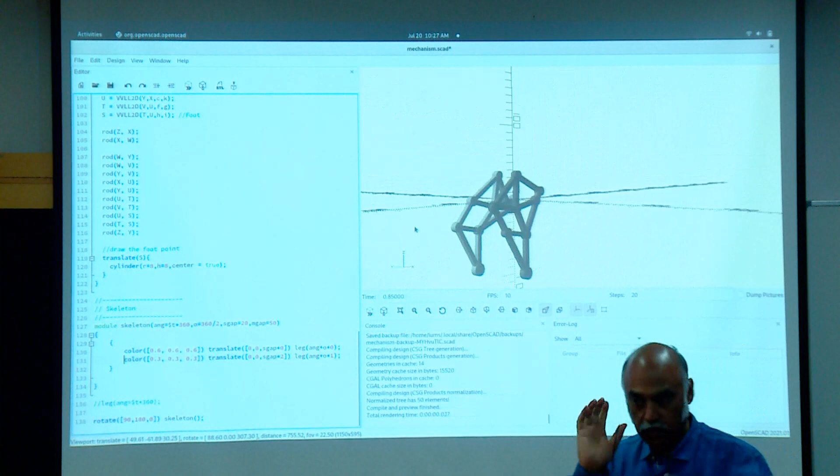So you see this will be the motor location here. Let me include the other leg also - okay, you have these 2 legs here. So you see the animal-like movement, nice animal-like movement, with a prime mover. The idea is to have this prime mover motor here, attach it to the legs, and share the load.

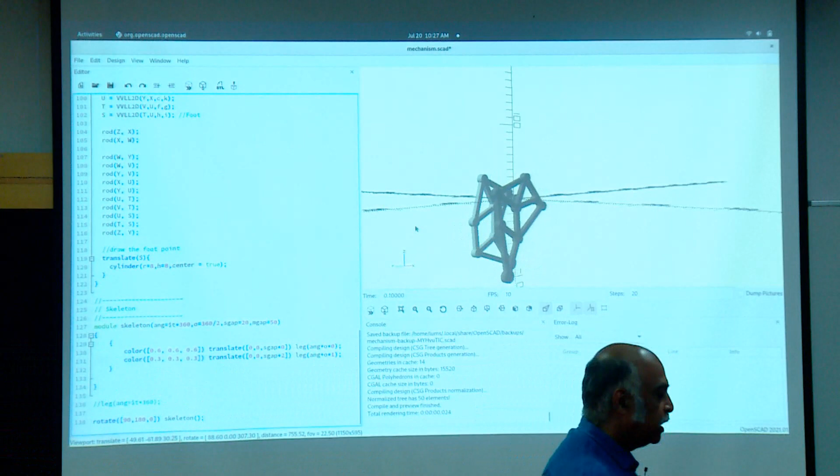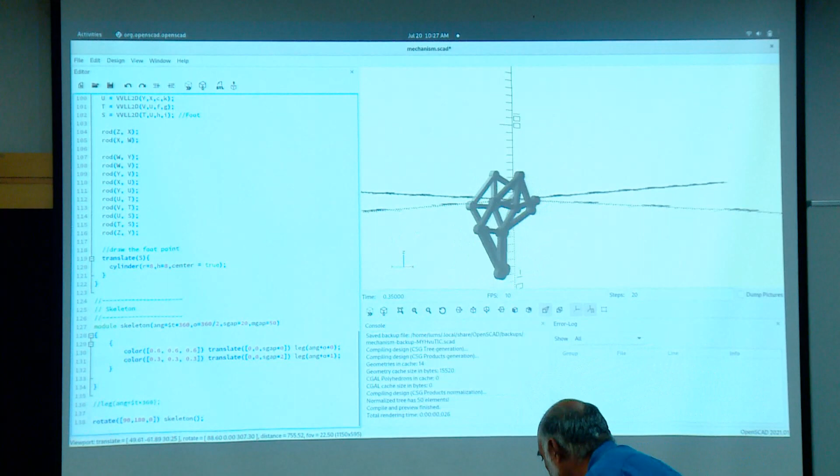It is still at research level, so I don't have results for that. So what I will do now is show one more video, and then one more last slide, and then we will close.

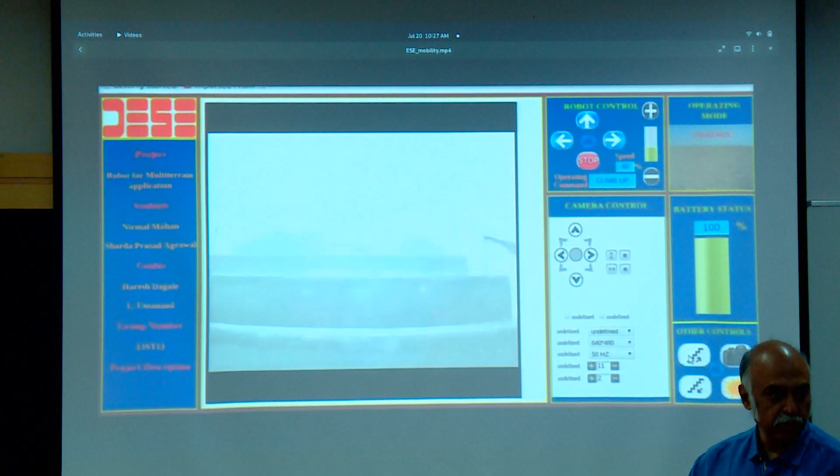This is just a video of some student implementations. This is again that rimless wheel - another rimless wheel which can climb the stairs. It also has a camera in front, so you can monitor where it is going from remote, through the camera eyes of the fellow, and then coming down also will be there.

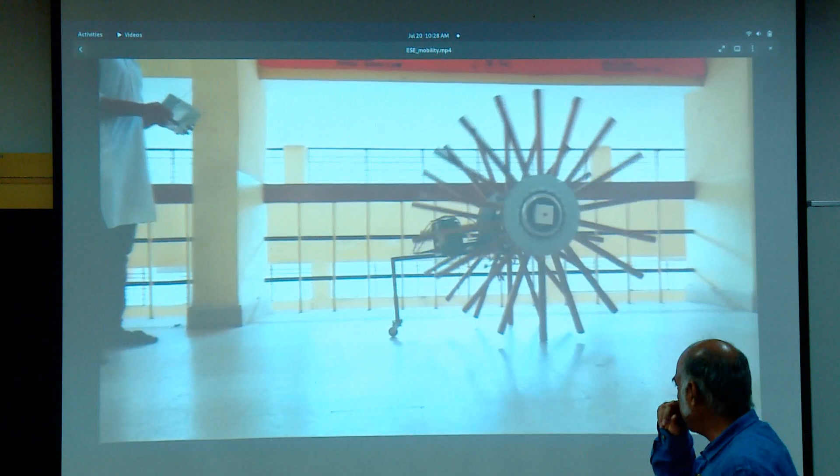So you don't need special infrastructure for that one. Okay, so this is the first rimless thing which was done, Lalit. And you would see the old auto rickshaw, the series hybrid.

This is the series hybrid, which was our first attempt at actually doing something. But it was in 2000. At 2000, I think the first vector control series hybrid on the road, I would say.

But now, of course, you have, and this is the latest one. This is still with that bad motor, and we have removed that motor. We have rewound it, we have to now fix it. This is, you will see the windscreen also. I mean, this one. Okay, so this is that one.

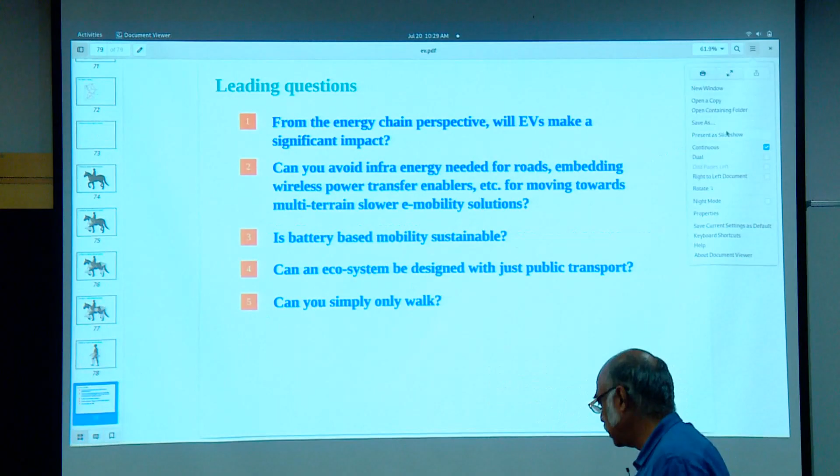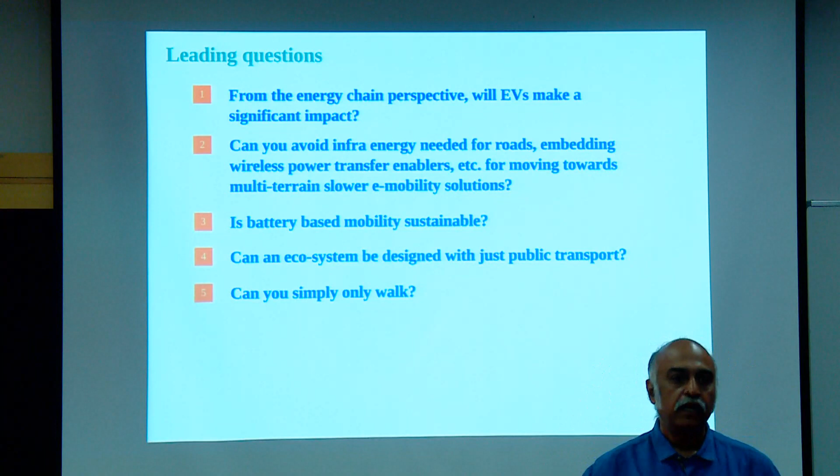So I will not waste too much of your time. Coming back to... okay. I will leave you with this. I will not, you just read it, and probably that could be the basis where you keep thinking, contemplating, and trying to move forward. Though I like the last comment the best.

Hi sir, my name is Naga Kiran. Thanks for the wonderful session, it was really informative. I read your paper. I think you were part of the team which released the study that HEV is better for India, from IISc and a group of engineers. So really appreciate an alternate perspective.

But what we do not seem to be considering is the amount of energy spent in extracting fossil fuel, refining it, transporting it across the world, then using it and burning it. Exactly, this is the point that comes up for electric vehicles also, because electricity is coming from fossil fuel. That is so true, you are doing the same thing for both. Additionally, you are also transmitting it, and then you will have to make batteries, and therefore you are losing out. So there was another study made elsewhere: if you use renewable energy for charging, then it makes more sense. So there is an option now, to use renewable energy. Yes, and the other studies showed that despite the long life cycle of both vehicles, it's one fifth the energy consumption. So I don't know whether that was considered in your studies.